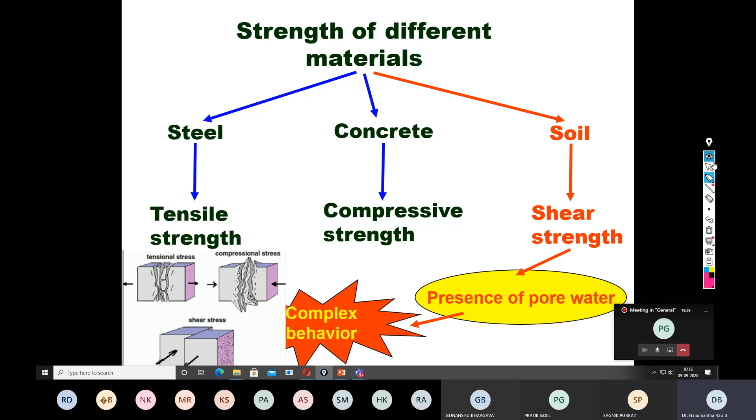Especially the shear strength theory is totally derived from engineering mechanics. That's why all our shear strength principles are derived by mathematicians, not by civil engineers. Normal stress is the component of the stress acting perpendicular to the surface, while shear stress is the component which acts parallel to the plane. Now in your solid mechanics, you have already understood. Is there a possibility of normal stress without shear stress? Yes, sir. Yes. And is there a possibility of shear stress without normal stress?

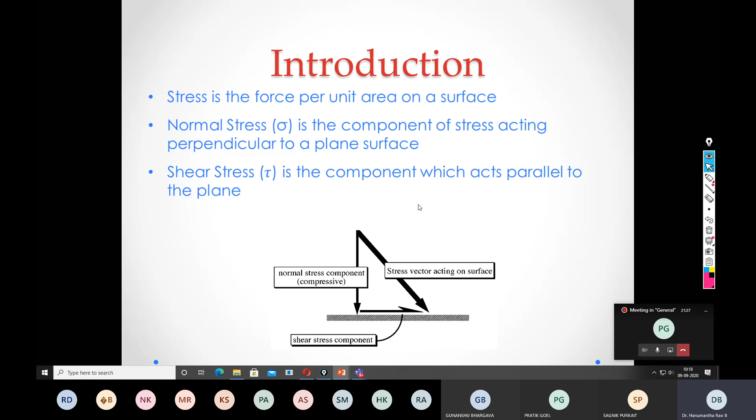Got the question or not? So both are possible, but may not be in a soil or in one particular material. So this may be a specific case. So there is a possibility of shear stress without normal stress, and there is a possibility of normal stress without shear stress. I will explain all those things, but not in detail. Let's see. So this is a simple understanding of the stresses.

So orthogonal planes on which the shear stresses are zero. For example, for a stress point O, there can be the xy plane, the xz plane, then the yz plane, on which the shear stresses will be zero. So these planes are called the principal stress planes. Try to understand.

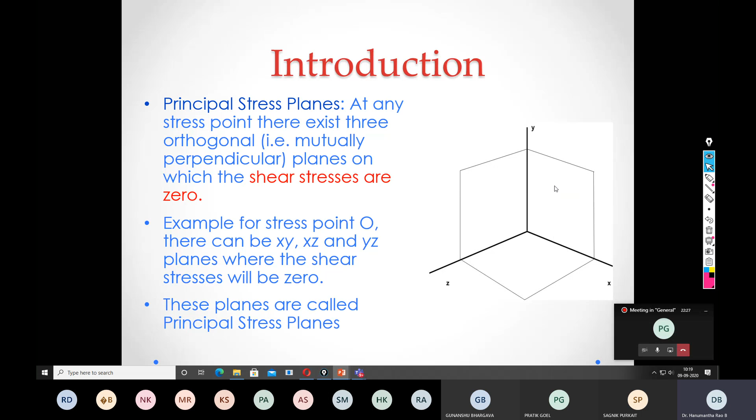These are the planes, not stresses. Principal stress planes. And on these planes act stresses; those are called principal stresses. The normal stresses which act on the principal stress plane are called the principal stresses. So in the z direction it is sigma 1, in the x direction sigma 3, y direction sigma 2. We can give any designation. It doesn't matter as long as you are conversant with it.

The maximum of these stresses is the major principal stress, sigma 1, that is in the vertical direction, and the minimum stress is called the minor principal stress, that is sigma 3. So you may ask, why should sigma 1 be maximum and why should sigma 3 be minimum? You already understood this when you dealt with your earth pressure theories. So the ratio between sigma 1 and sigma 3 is called the... what do you call this ratio? Earth pressure coefficient.

Okay, the ratio, that is sigma 3 by sigma 1 or sigma h by sigma v. K is called the ratio of sigma H by sigma V. That means a certain fraction of sigma 1 is equivalent to sigma 3. So depending upon the direction, if the wall moves away, it is called active earth pressure, if the wall moves towards the soil, it is called passive earth pressure, and if it doesn't move in any direction, it is called the at rest condition.

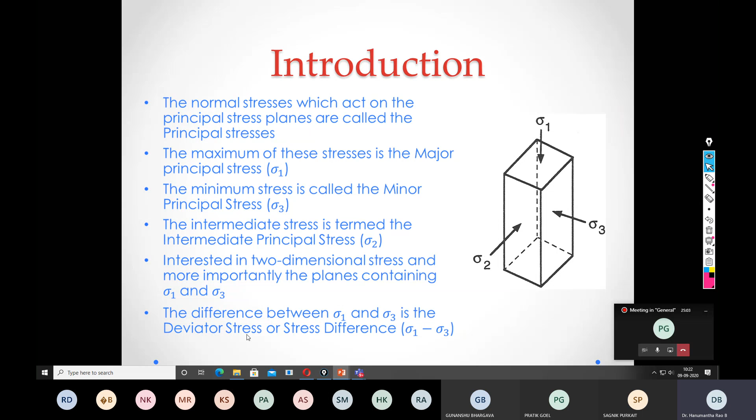So we are interested in two-dimensional stresses and more importantly the planes containing sigma 1 and sigma 3. The difference between sigma 1 and sigma 3 is called the deviator stress or stress difference. You understood this part in your shear strength theory. So this is a simple mechanism.

So the failure stress development is highly dependent on how much vertical stress V and horizontal stress H you apply. Of course, even if you apply only V, there is a possibility of a failure plane developing, and even if you apply H and V together, still there is a possibility of the failure plane. But if you apply H and V with equal intensity, there may not be any failure plane. You try it. If you apply equal magnitude of H and V, what happens to the failure plane?

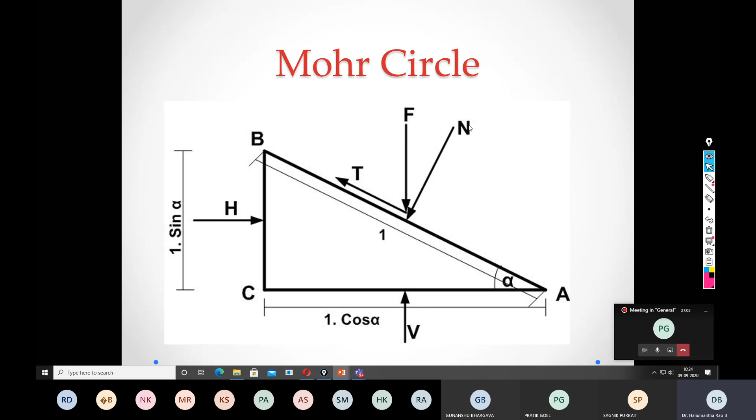Now once we apply the horizontal stress in the form of a confining pressure and vertical stress in the form of a deviator stress, what would be the values of normal stress and tangential stress, and F is the resultant of these two. So this is the equation. These equations are equivalent to a circle.

For example, I will demonstrate tau. This is sigma 1 minus sigma 3 by 2 into sin 2 alpha. If you take sigma 1 minus sigma 3 by 2, this is equal to the radius of the circle. Forget about the sin 2 alpha. If you recall the Mohr circle diagram, the vertical ordinate sigma 1 minus sigma 3 by 2 is nothing but your shear stress, and normal stress is the distance from the horizontal to the center of the circle,

that is sigma 1 plus sigma 3 by 2 plus sigma 1 minus sigma 3 by 2 into cos 2 alpha. So depending upon the applied sigma 1 and sigma 3, you are able to determine the normal stress and the shear stress if the failure plane is known. Plotting this circle in the tau sigma space for the element gives the Mohr circle diagram. Mohr is the person who found the easy way of determining the normal stresses and shear stresses. I will take one or two complete classes on the Mohr circle, maybe after this class.

So this represents the state of stress at a point at equilibrium. This sigma and tau represent the state of stress at a point at equilibrium. Any point on the circle represents the stress, that is sigma and tau, normal and shear, on a plane inclined at an angle alpha to the horizontal plane or the minor principal stress, depending upon the case.

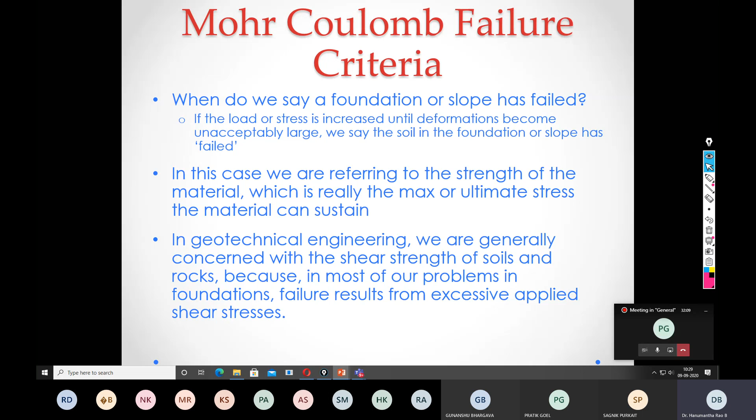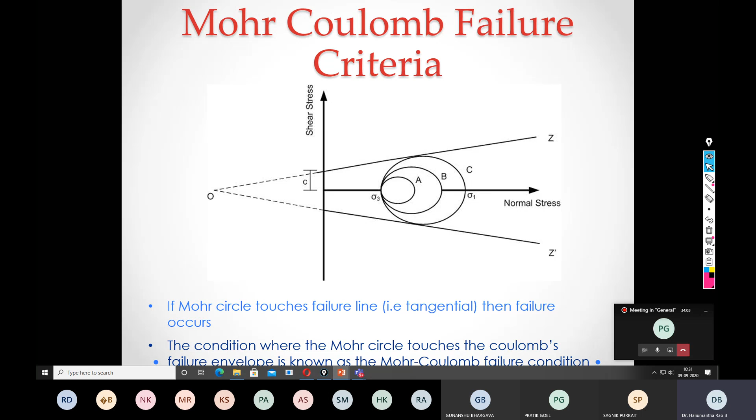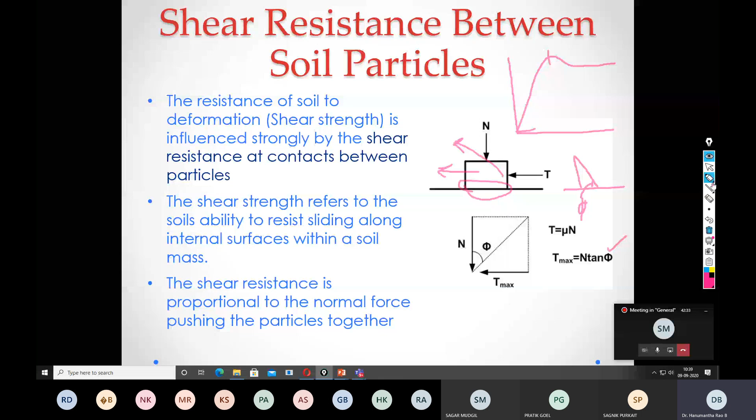Okay, so these are the fundamental mechanisms of shear strength development. Shear strength is nothing but resistance to shearing stresses. Shear failure occurs due to sliding and rolling. You can understand how the sliding and the rolling occur among the soil particles. This is called rolling of one particle over the other. As a result of rolling and sliding, we can achieve the densest possible state of the soil mass.

When there is sliding, the sliding is the first one, followed by the rolling over. So the sliding initially adjusts the particles to pack in such a way that the soil mass achieves the densest possible state. Once sliding is completed, then rolling takes place. Rolling means, now let us try to understand.

When particles are rolled, suppose this particle is rolling over this particle. You can see this is the angle, the inclination between these two. That means there is a possibility of development of normal and shear stresses between these two. Normal stress is because of the overburden pressure, and shear stresses are because of the friction when this particle is trying to roll over.

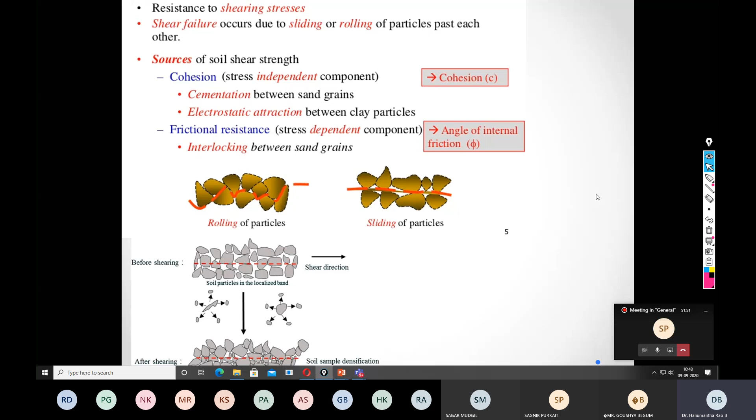So when you join all the lines, you are saying that the slope of this one can be linked to the failure plane angle, the angle at which the soil particles failed, and the intercept is called the cohesion. This is what exactly happens in the soil. But in general, you go in a reverse way. Reverse way means I know the angle of internal friction of the soil. Then I want to know the shear stress and the normal stress at which the soil fails.

Because when you design a building or any foundation, what do you need? You need how much load of superstructure I can apply on a given soil. So from these parameters, which one is related to your superstructure load? Normal stress. Exactly. So now if I know the phi value, I can determine the normal stress. Yes, sir. From this graph. So this normal stress can be linked to your superstructure load. So we go in a reverse way.

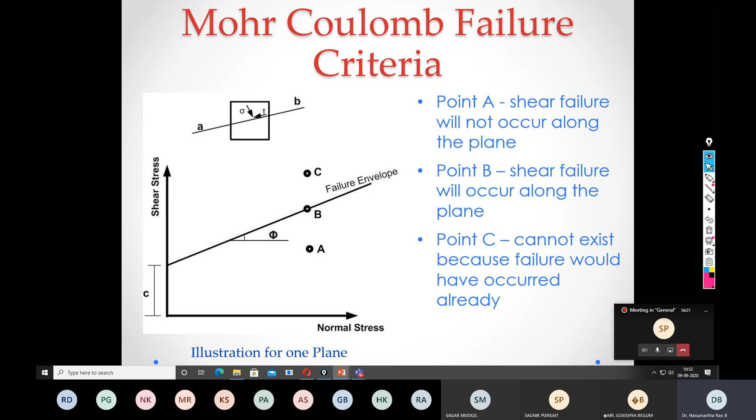I think this sigma tau only. These are not. Suppose if you look at this equation, yeah. What is this one? Sigma alpha and tau alpha. That is the normal stress and shear stress of the unit soil mass at any kind of failure plane. So in your case, the maximum principal stress is the stress where the shear stress is 0. Yes, sir. And that has to happen when theta becomes 0, na?

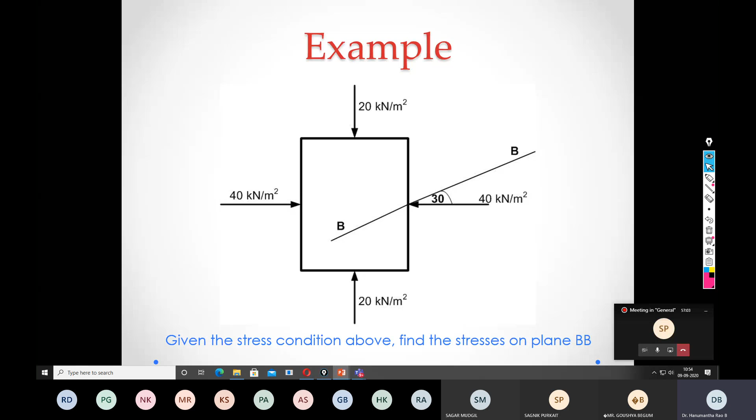That can happen only when theta is 0 or this alpha is 0. Yes, sir. If alpha is 0, there is no shear stress. Then whatever the stress is there, that becomes your principal stress. Yes, sir. Okay. You got it? Yes, sir. So in that case, what is the failure plane angle? 45 degree. That's it. So when the failure plane develops at 45 degree, there exists only the maximum normal stress. There cannot be any shear stress on that plane.

Okay. So the maximum shear stress is always acting at 45 degree angle. Exactly. Okay, but in case of soil, maximum stress is also on 45 degree, right? No. It is always lesser than that. 45 is possible only in case of rocks. That's why our internal friction angle will not normally exceed 30. If you look at any natural soil, your friction angle will not exceed 30.

Only for coarse grained sand, where the particle size is 4.75 to 2 millimeter or 1 millimeter, the friction angle reaches about 32 to 34. For soil in general, it is always less than 30. That is the friction angle. And if you put that 30 into 45 plus 30 by 2, that's how you get 60. Yes, sir. Okay. But if it is 45, then the shear stress becomes 0. So there is a difference between your principal stresses and this angle of internal friction.

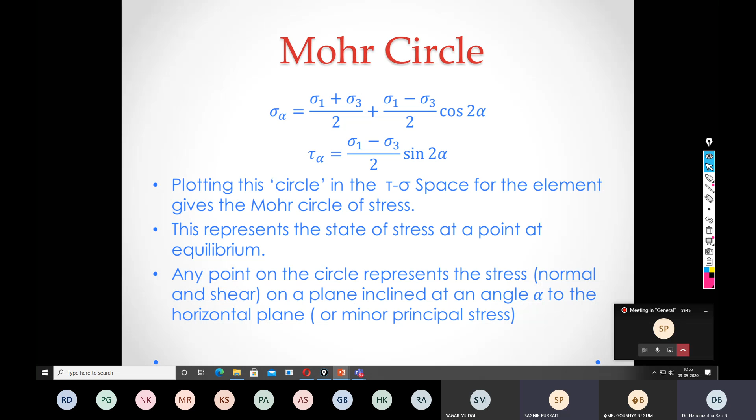When it is 45 degree, where is that? Yeah. So when it is 45 degree, there is no soil at all. So why is there no soil at all? When theta is 45, because if theta has to become 45, phi has to become 0. When phi is 0, it means purely cohesive. In the case of purely cohesive soil, like bentonite, it can happen. True.